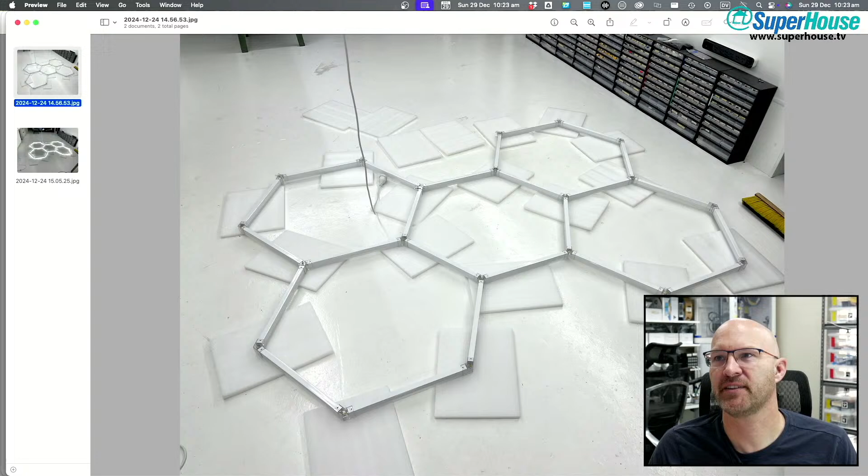And then when you add the intermediate stuff, this was starting to set up the hexagon lights on the floor in the clean room. Here you can see the first few segments turned on. I assembled it face down because it needed to just be lifted straight up to attach to the beams to go up on the ceiling.

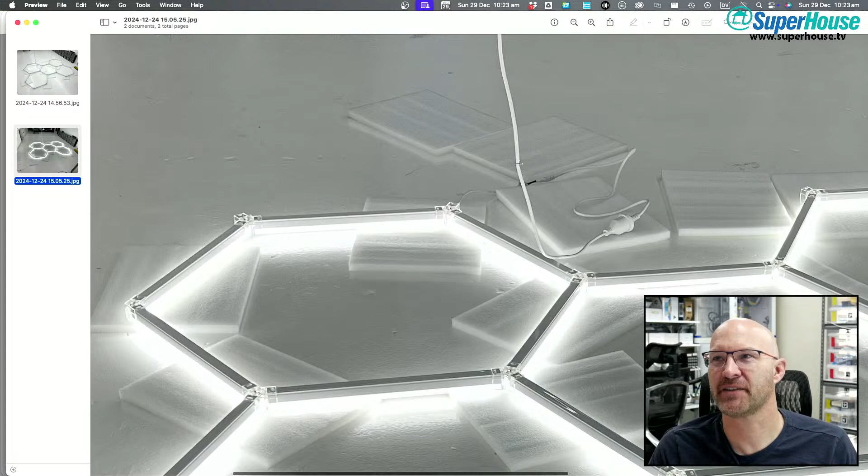So I assembled it sitting on all of these little pieces of foam. These are bits of foam that some people might recognize. I have so many of these, like vertical meters of stacks of these bits of foam, because I get one in every solder stencil I get. Every time I get stencils from JLC, I get another piece of foam in it, and the stack is higher than me off the floor.

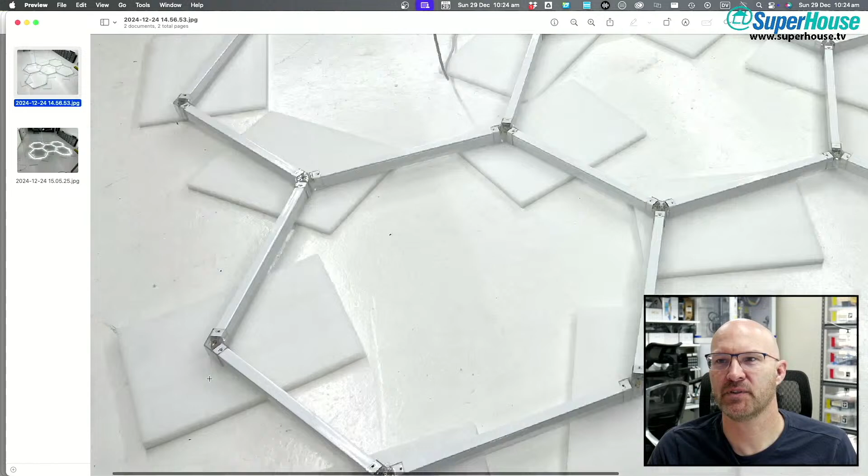So that was it, and you can see the system here, it's kind of like Lego, big Lego. These segments of lights plug into connectors, and there are different connectors for different parts of it. So this one's a, what was it, 130 degree connector, 130 degrees that way, I think, I can't remember. And there are the three-way connectors there. Then there are straight connectors and right angle connectors. So you plug them together to make the pattern.

Is anybody still here? Dodgy. Dodgy! Dodgy is here, 120 degrees. Yes, Stephen W., you are correct, it is 120 degrees. Why did I not, how did my brain not math that?

I scared you away. Andrew, are you going to Adelaide for Everything Open? I just booked my accommodation and ticket a few days ago, so I am definitely going. Got to see, yeah, Keith H. 130 is John's version of a hexagon. Russell Rainey is here, Dodgy Brothers is here, Dodgy Brothers Engineering. Oh, Andrew, you won't be making it to Everything Open, that's a pity.

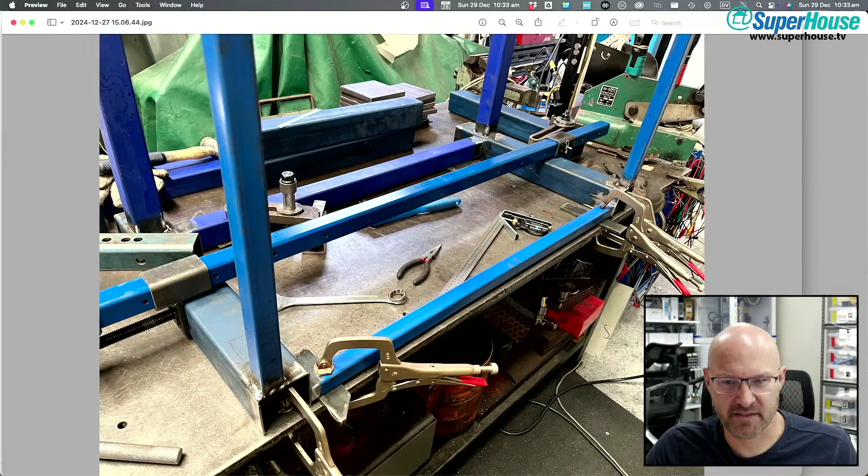Yes, I've got some more photos to show you. More photos, photos of welding, some of the things that I've been doing during the week, like this. Hang on, I'm going to go back, I've got to find what has happened. All right, what I'm going to do is open Photos on my Mac, Apple Photos.

Austin's_creations said, have you had the AQS running while doing work in the cleanish room? Ah, I have not, sadly.

Why? Not enough local storage. Have I run out of space on my computer? Because that would be sad. I have, I've only got 8.5 gig left on the disk in my Mac Mini. That's why these photos and things aren't syncing. Okay, I'm going to have to do something about cleaning up some space on my computer. That's weird because I had about 200 gig available just last time I checked, which wasn't that long ago, maybe a couple of weeks ago. I don't know where all the space has gone. But that means I can't show you photos.

Although I wonder if... okay, I'm going to risk opening Discord. No, I'm going to make you suffer by staring at my face while Discord is opening.

Unexpected Maker said, Newsbreak: John starts 100 projects this week and finishes none.

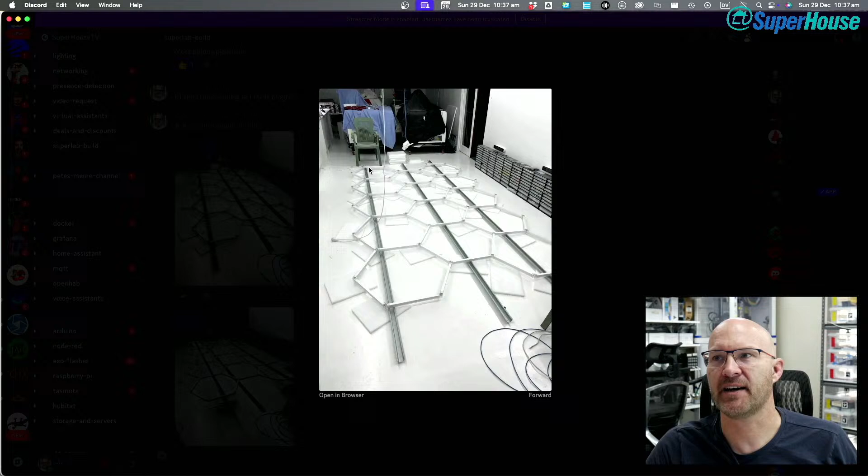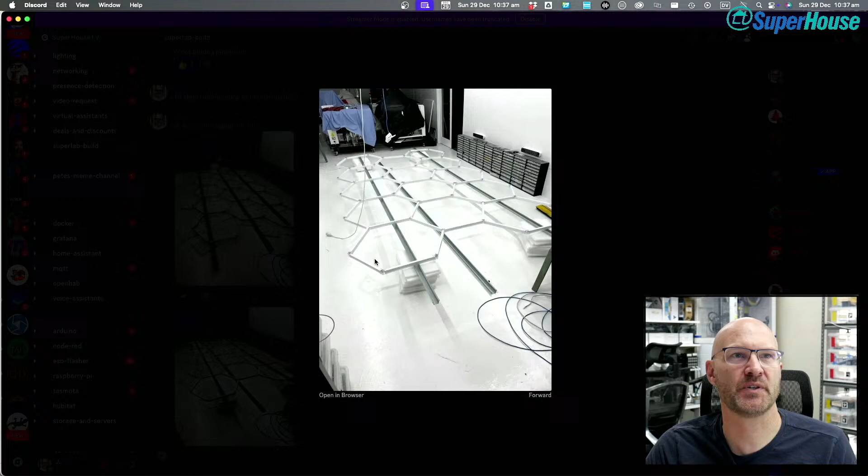So I ended up putting 3 underneath, by sort of lifting the grid and sliding it under, and then I started raising the grid, and discovered I only needed 2. So I just had these 2, and you can see it's supported on stacks of white foam to get it up off the ground. At this point, the hexagon grid was sitting on the purlins.

And then I've got to paint these white - I'm going to paint the screw heads white to make those disappear as well.

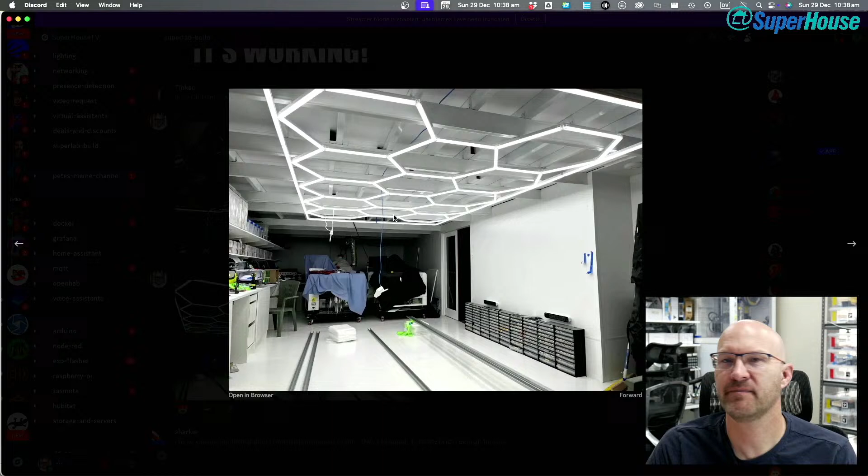And then this, which is with the grid turned on, obviously, because you can see that. Why am I stating the obvious? Same thing, let's go open in browser.

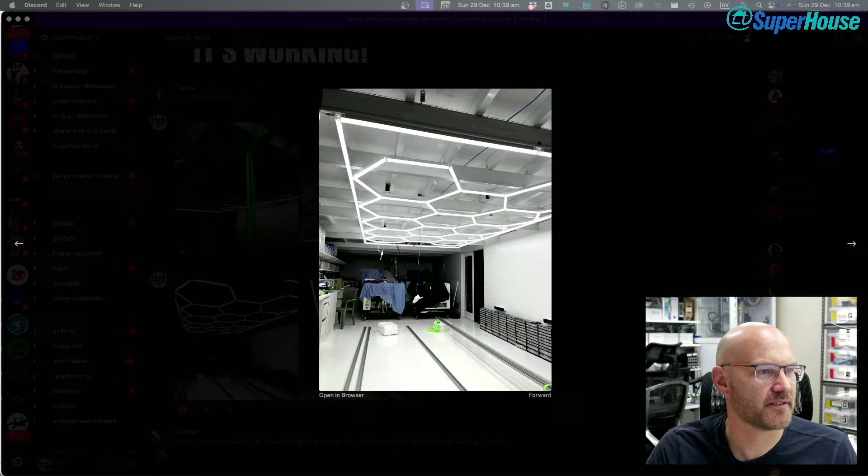Ostrov asked, did you run out of straps that you had to use a cable as well? Kinda - if you're referring to this, you can see the off-cut bits of mains cable here. These are bits of cable that were previously joining the LED lighting battens that I took out, so I ended up with a few lengths maybe 1.5 meters long. I put that up over the beam and twisted it to act as a support. You can also see some ocky straps here.

So I used a combination of things, because I did all of this on my own, and this is 6 meters long and nearly 4 meters - like 3.8 meters - wide. What I had to do was go to one corner, raise it a bit, tie it off, go to another corner, raise it a bit, tie it off, and keep going around and around like that. By moving it in 25 centimeter increments at a time, I slowly moved the entire matrix up to the ceiling. At different points I had ocky straps around it, electrical cable tied around different things, and these tie-down straps using just the tails of the straps.

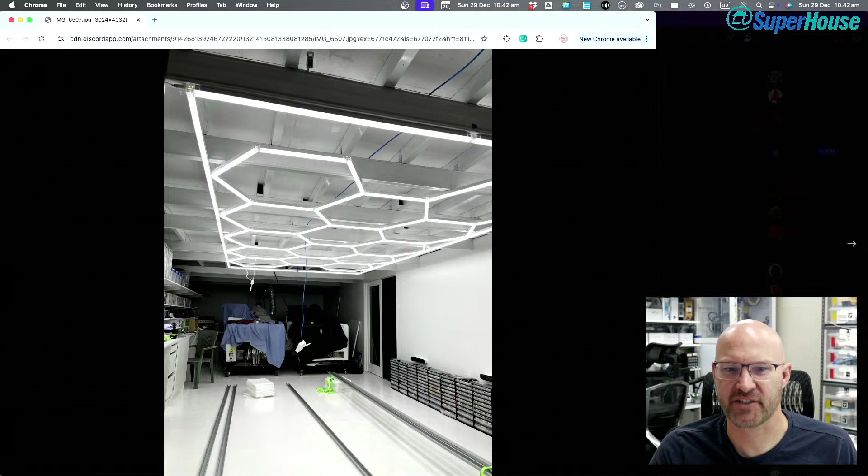So you can see the ends of the purlins, which look black, which is horrible. I wanted to make those vanish. So one of the other things that I did was...

Scott Miller said, after that, I have a big pile of the tail ends of CAT6 spools. Might have to get into light hanging.

Oh yeah, so you got lots and lots of little bits of Cat 6. So what I ended up doing was laser cutting some pieces to make end caps. I cut this piece with little holes in it for a reason you'll see in a minute, and I cut rectangular pieces without holes that were slightly larger. So these pieces, the white part, is the same profile as the end of the purlins. It's 50 millimeters by 100 millimeters with rounded corners.

And then the clear piece, which you can see sitting on top with the holes in it, is a little bit smaller so that it fits inside the end of the purlin. The reason I cut these holes was to be able to put drips of super glue in there so it would make it strong. A lot of the strength of the bond between these two layers is because I dripped super glue into these holes, which then wicked into the joint between the two so that the two faces end up becoming quite strongly glued together. And then I put a couple of drops of super glue around the edge as well.

But the result was plugs that could go into the ends of those purlins, kind of like this. So this is without it being fully finished. You can see that there's still some painting to be done there.

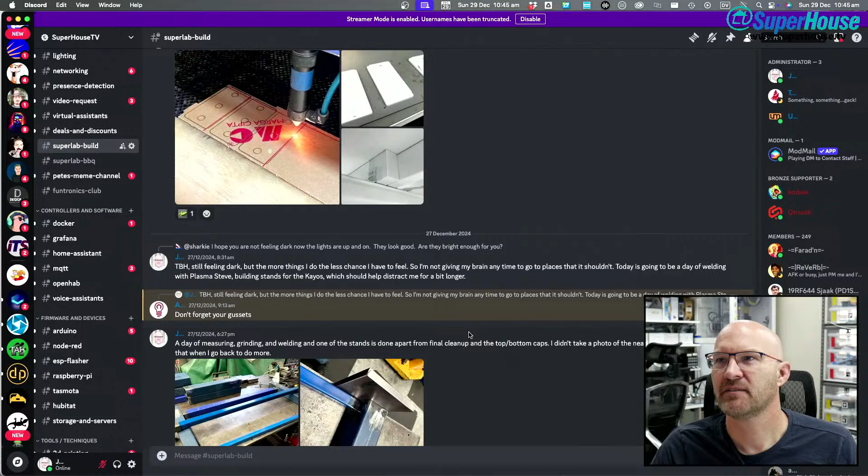And then got into this. Somewhere here I think I have photos. Yes, photos. So this was welding up the... hang on, I'm going to open, what am I going to open? All of those.

So this was starting to weld up the stands for the pick and place machines. You get this blue bar across the top here is a clamp, so that clamps all the way across the thing, and this is one of the legs. Then you can see the bottom bar. We're looking at this upside down at the moment, and the things weren't properly in position. So the large bar goes on the bottom, little bar goes on the top, and the little bar actually ends up, as you can see there, it's skewed.

This was before anything was properly in position. It was just getting things approximately in place to figure out how we were going to clamp everything and lay it all up for welding.

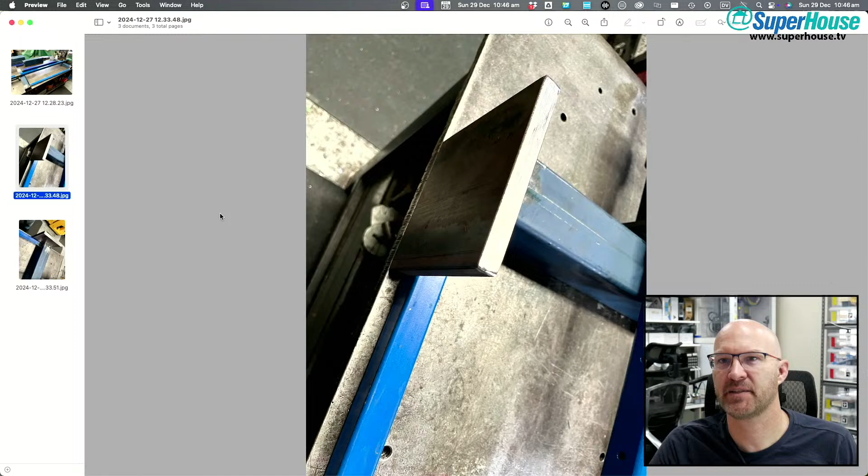And that was with one of the mounting plates just sitting in place, so as you can see, nothing welded yet. This is going to be one of the plates that the pick and place machine sits on. There's one plate like this on each corner, and they go over the position where the feet currently are on the machine, with a hole through that so the machine will be bolted down to the stand.

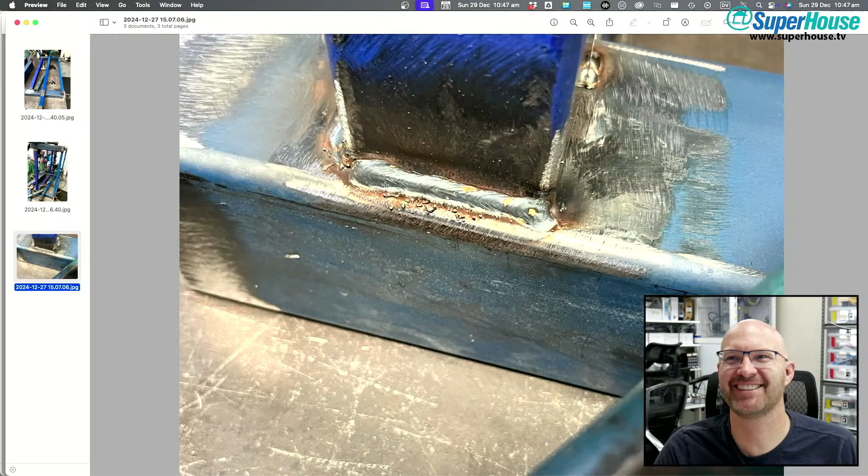And then let's see... ooh, what happened then? Okay. Then we've got this, not a very interesting photo, and a weld that I'm not too ashamed of. So I'll show you this one because it doesn't look too bad.

Then this was towards the end of assembling the main frame. So the two sides were done flat on the bench as separate pieces. You can see the bench under here, this steel plate. That's my friend Steve's welding bench, and it weighs about half a ton, I think. It's an enormous steel plate with holes in it.

These are threaded holes for like M16 or M12 bolts or something, so that he can put in tie downs. You can see there's a bolt through there with a tie down, so it's clamping this part of the leg down to the bench.

So what we did was make the two - front and back? Yeah, we did the front, and then we did the back, and then stood them on their edges and joined them into a box by putting, you can see here, this is another piece clamped in place. There's a top piece clamped in place, and then welded all of those and turned the whole thing into a big box.

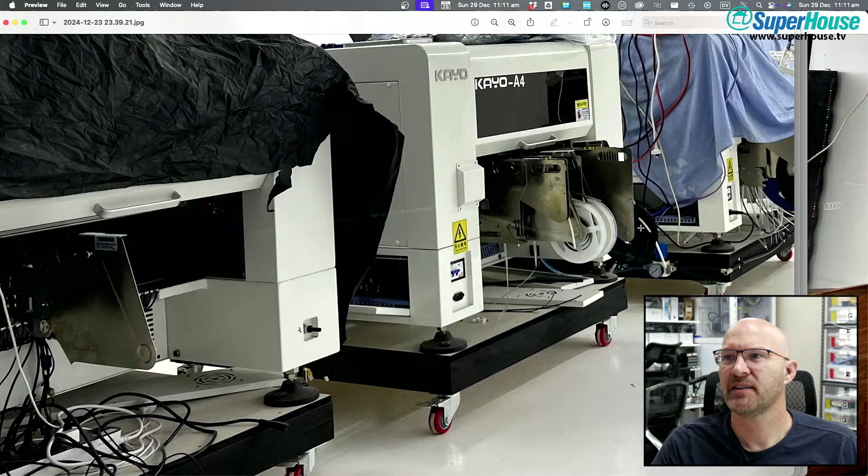Each of the machines with Lachlan's forklift and put them on these trolleys. The whole idea with that was just so that I could move them around, because when these machines are loaded up, they're a few hundred kilos, somewhere in the order of 300 kilos. So I needed to be able to just shift them around and rearrange them. We put them on the trolleys and they haven't come off since. And that's been, how long? A year and a half, maybe? They're still sitting on the trolleys.

That is not where they are intended to run. And that's actually one of the reasons I could just put them down on the floor and then crank the speed up. So I'm running at 50% speed at the moment, because more than that and the trolleys just start throwing themselves around. Even when you put the locks on the wheels, just the slop, the play in the wheels and everything, it's not good. The machines need to be much more physically anchored to be able to run at full speed.

So my goal is to get them onto the stands, and there'll be adjustable feet on the bottom of the stands with shock absorbing feet and adjustable leveling to get them all perfectly level and aligned so that all the conveyor belts line up.

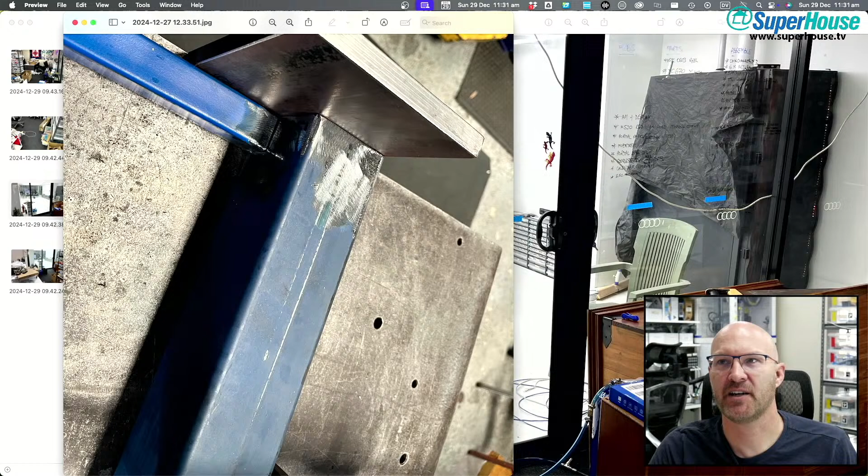And yeah, the result is - gaze upon that chaos. It's such a mess. It breaks my mind when it's like this, but it's inevitable.

It gets to a certain point where, in order to make progress and rearrange the room, I had to commit to just ripping everything apart. Everything is going to end up in piles on the floor. Nothing is where it's meant to be, but this is a transition period I've got to get through to get to the other side. That is to allow this - with everything moved out of the way, so I can then work on the ceiling and put in the stands and that sort of thing. In the meantime, I have to live with the chaos. There's just stuff everywhere.

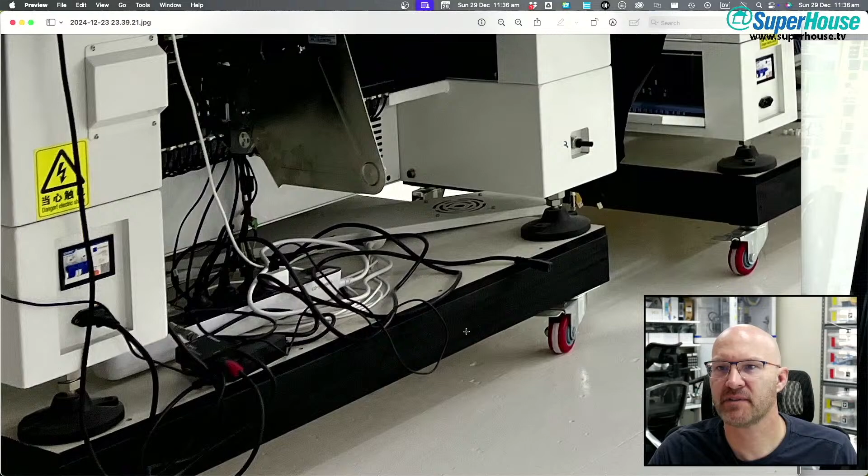All right, this photo, I think on this photo I can probably get in close enough to show you what I mean. Now if we zoom in, where's the focus bit? Yeah, okay, look at this. This is one of the feet.

These are specifically designed for this purpose. They've got the shock absorption properties, and they've got bolt down, like tie down. You can see there are 2 holes through it. So you can actually bolt these feet to the floor and stop them moving around, but then the shock absorption properties in them will

Still be in effect. So what you can see here, you see the 2 nuts. It looks like 2 nuts. This bottom one is part of the shaft that goes all the way through. So there is a vertical M20 threaded rod that goes all the way through here, up through the machine.

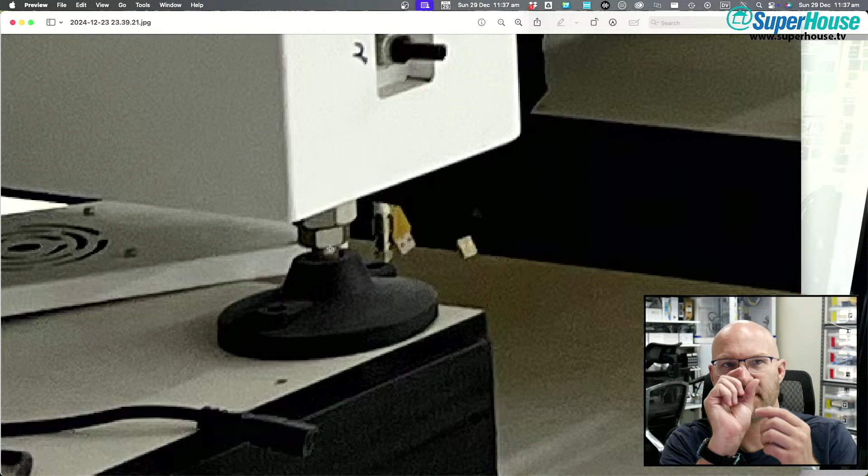And this bottom one here, that is the one that you put a spanner onto to turn to raise and lower the legs. And there is like a little ball socket inside here. So the bottom of that rod, just in this area here, goes into a ball socket so that it can turn without the foot rotating. So the foot doesn't turn, you turn the rod that goes up through the machine, and it raises or lowers it.

So that one is actually machined as part of the rod. I think it's all one piece. I think it was machined that way. It's not, it looks like a nut that is sitting on it, but it's not. It's actually part of the shaft.

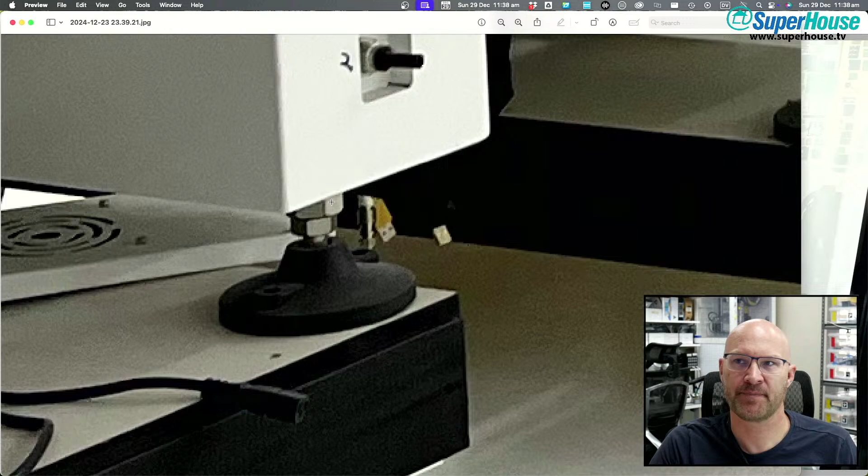Now the one above it, you see this one here, that's partly obscured by the base of the machine, that is a lock nut. So the idea is that you have it released, you adjust the height of the foot, you get everything perfectly level, and then you do up the lock nut, you raise it up so that it engages with the bottom of the body, and it stops this from being able to turn.

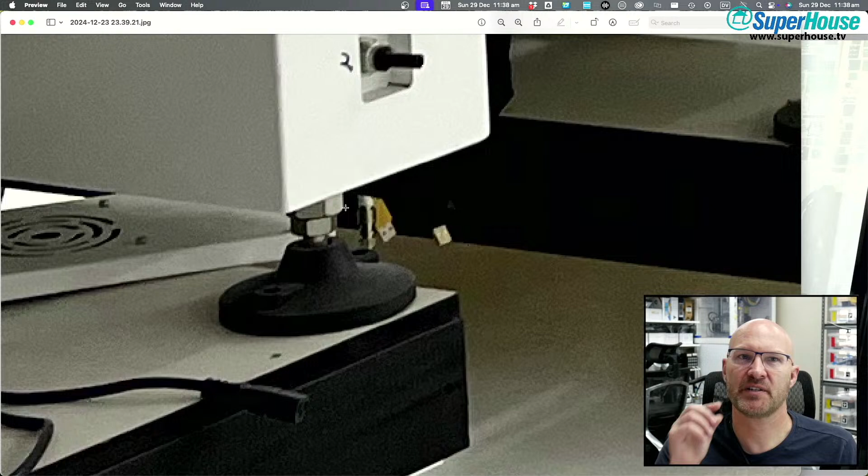Now the thing is, this lock nut is huge. It's like, I think it's 20 millimeters vertically. Like the actual length of the nut is 20 millimeters. It's enormous. So what that means is, well, Steve suggested that I chuck these in a lathe and turn them down, basically take half the length off that, because it's not a structural nut really, it's just a lock nut. It's not taking the weight of the machine, it's just jamming up against the body of it to stop the thread from rotating and therefore the height of the machine from changing.

So we could easily take that from a 20 millimeter nut down to a 10 millimeter nut. So I could do that. Yeah. I could turn it down to make it a 10 millimeter nut, and that would gain me back the 10 millimeters that I need, yeah, it'll gain me back almost the 12 millimeters and put me right back in the sweet spot. That's a valid solution.

And the other thing I could do is just buy new nuts. I could buy half thickness nuts and not have to bother with turning it down in the lathe. And in fact, this is probably the best solution, because one of the things that I still need to do is buy the nut to weld onto the bottom of the stand for this to go into. So what I could do is use these nuts. I could take these nuts off, weld them onto the stands, and then buy M20 half thickness nuts, like short nuts, and use those as the lock nuts in here. So I think that's probably going to be the neatest solution to all of this.

Seeing this has totally changed my opinion on how to run my machines. Well, seeing this and having a conversation with Tom, we've been talking through the workflow of how to increase our throughput and take advantage of having multiple machines.

Wagon Loads said use a screw jack. Crispian says, why? What did Jack do? Well, Jack got lucky, didn't he? Jealous of Jack.

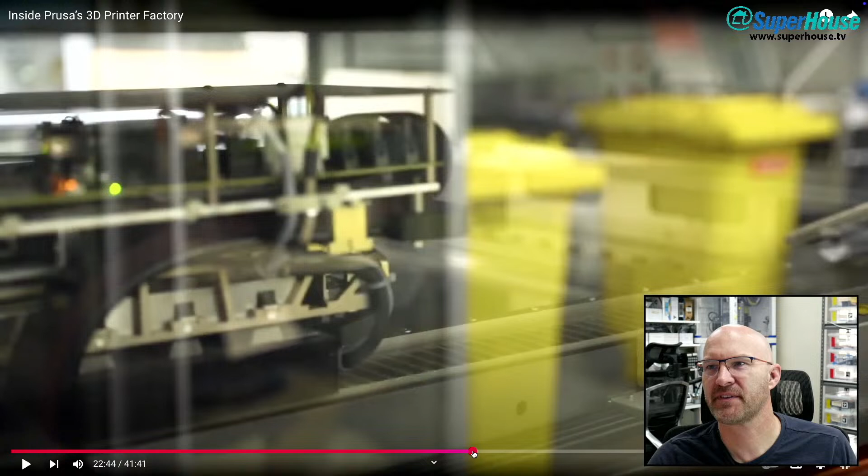Scotty here is standing in front of the Prusa production line, and they have I think 4 or 5 machines. You can see the reflow oven there - that reflow oven is huge, like 4 or 5 meters long.

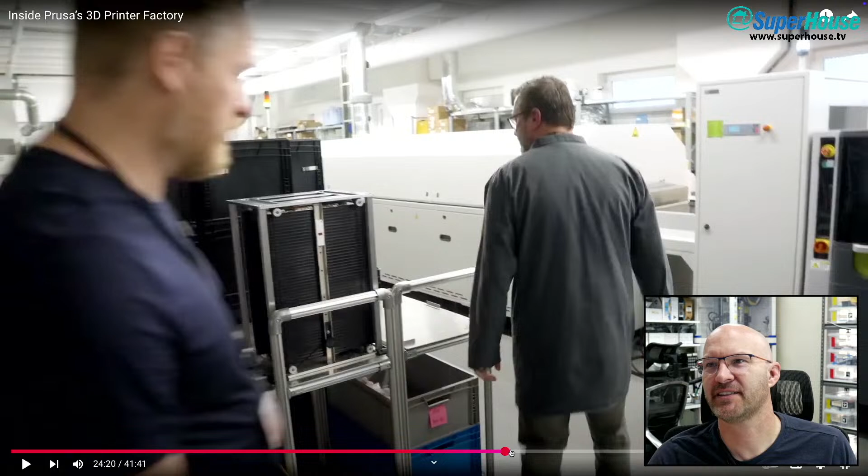Somewhere, oh no, this is onto the - oh yeah, look at that, you can see there, that's their reflow oven. Makes Bernie Boy look like a novelty toy.

Oh, here they have storage for reels. This storage system goes up and down, I think he said 5 or 7 meters vertically. You can see all of these trays, each filled with reels. On the touchscreen, they dial up the parts they want, and it's like a big vertical carousel - it rotates around to bring the trays with the parts you want to the front and then brings them out to you. So it's a way of bulk storing lots of parts in a climate controlled way. But where are we?

Back to the pick and place machines. I'm just going to play this for a second to get to the spot I want and hopefully not get any copyright strikes. I'm trying to get to this area. So these are some of the feeders - this is on one of the, not the first machine.

It's a roller wall carousel, says Jack's Tech. Yep. Okay, split board loading so that each machine is spending the same time to load its board parts.